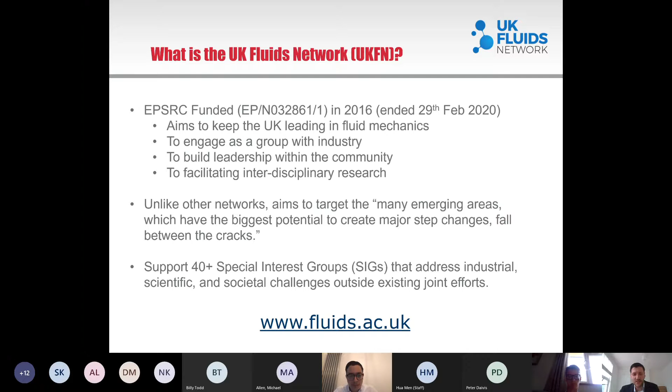So this slide is a bit old, but previously they supported about 40 special interest groups. If you go to the Fluids website, I think it's gone up considerably. The original deal was that you applied to do one of these special interest groups, and they gave you a small amount of money for a conference, a couple of thousand pounds, and then the idea is you then fund your next conferences.

Now the nice thing about doing this online is it doesn't cost us anything. So this one we've done free, but in the future, if anyone would like to host or has a bit of funding for a conference, we can definitely advertise it through this, under the banner of this. It's meant to be a UK based consortium, but to be honest, it's really just historical, and we can definitely grow something more international from that - it's my opinion.

So a special interest group, as I mentioned, is this idea of separate areas within fluid dynamics which we target. Now, the logic of doing a special interest group in non-equilibrium molecular dynamics was really to target this gap between statistical physics and doing fluid dynamics with molecules. We already had a really good SIG in fluid dynamics across the scales that covered molecular dynamics, but also extended to lattice Boltzmann and lattice gas.

The idea here was to do something that's more focused on the NEMD type of problems. So that's the division.

You can tell I'm out of practice with this, struggling with all the tabs.

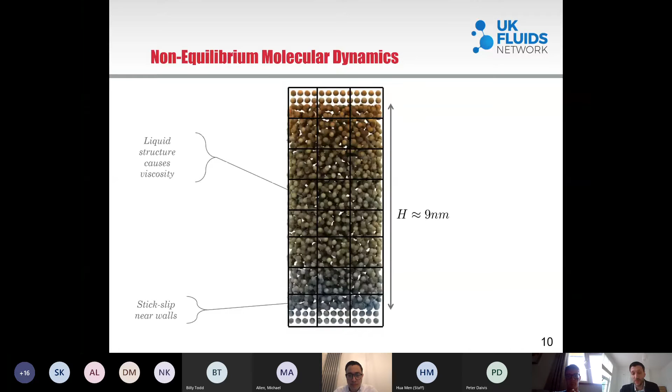What you see from those molecules bouncing around is this emergent property of fluid dynamics. You get nice behaviors that are uniquely molecular, like stick-slip near walls, viscosity coming from liquid structure itself. This overall behavior of the fluid is colored by velocity, positive and negative. You can actually extract fluid dynamics from the movement of molecules, and you get something like Couette flow from that.

So this is one aspect, just running some molecular simulation and averaging it.

I'd say the other thing we bring as a community, and this is where the link to fluid dynamics and the UK Fluids Network is important, is we have this whole physics and chemistry community with concepts like radial distribution functions, liquid structure, fluctuation theorem, Liouville's equation, and the way we get viscosity and surface tension from the underlying system. These are just some examples. This is where we have real ability to offer the fluids community, understanding how we get these emergent properties and linking statistical mechanics to fluids. That was the real incentive for doing this.

So the subject and scope is NEMD is fundamental fluid dynamics, but using MD. The non-equilibrium here is because of thermodynamic origins, things like wall motion, temperature or pressure gradients driving a fluid away from thermodynamic equilibrium, or equilibrium with an interface, locally spatially inhomogeneous. This is fluid dynamics - all of these problems are exactly what we're studying in fluid dynamics, but we can simulate them in a more fundamental way, with statistical mechanics underpinning that lets us make sense of fluids problems.

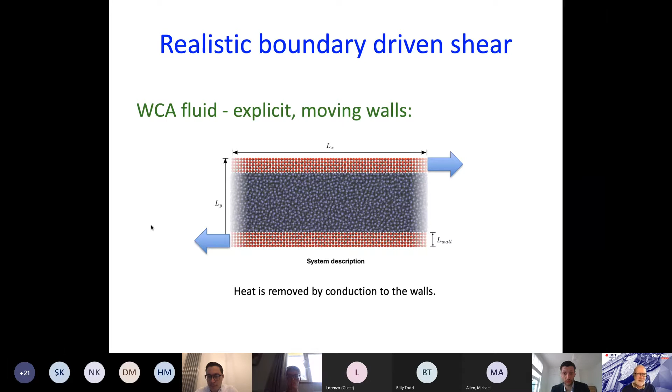So let's look at a boundary-driven shear system where we have a couple of walls and they're moving relative to each other, and we have a fluid in between. And in that case, the heat that's produced by the shear, the dissipation due to shear, that's removed by conduction to the walls in this particular type of simulation. So we can thermostat the walls and remove the heat naturally, and that means that there's no sort of artificial thermostat applied to the fluid.

Oops, oh, I didn't mean to do that. There we go.

And we can describe that system by looking at the entropy production, because we can think about it from the point of view of non-equilibrium thermodynamics. And based on the ideas of local thermodynamic equilibrium, we can write down an entropy balance equation where we have, in the green there, the entropy flux, and in the other colour, beige or something, the entropy production. And the entropy production consists of two terms for a single component system. We've got a term that's proportional to the temperature gradient and the heat flux, so it's bilinear in the flux and the field, or the driving force, thermodynamic driving force. So that's the entropy production due to heat flow. And then we have another term which is the entropy production due to the deformation of the material, so that's the viscous flow term in the entropy production.

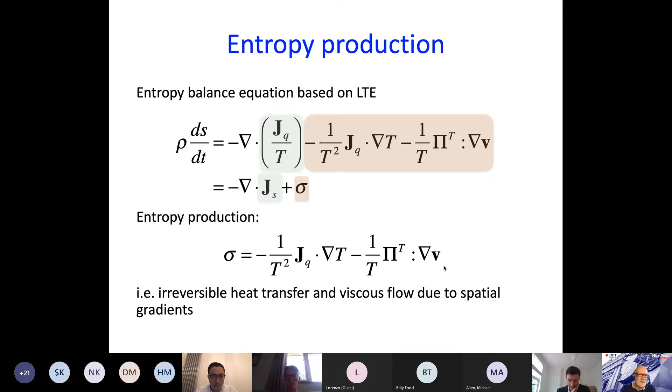So that's all good. So what about in homogeneous shear? In homogeneous shear, we have a very well-defined value of the density at all points in the system. The temperature is uniform, and we have no spatial gradients.

So that means if there's no spatial gradients in anything, it means that we have to use homogeneous thermostats to remove heat from the system. The heat is removed uniformly right across the system with no spatial temperature gradients driving heat to the walls. So that raises a question.

Does that mean that there's no entropy production due to heat flow? Because we have no spatial gradients of the temperature. So I'll leave that hanging, because this is the central question that I really want to address in this talk.

But there are many other thermostats that we can apply. This is the standard kinetic thermostat that we use in non-equilibrium MD very often, but this is not the only thermostat that we can apply.

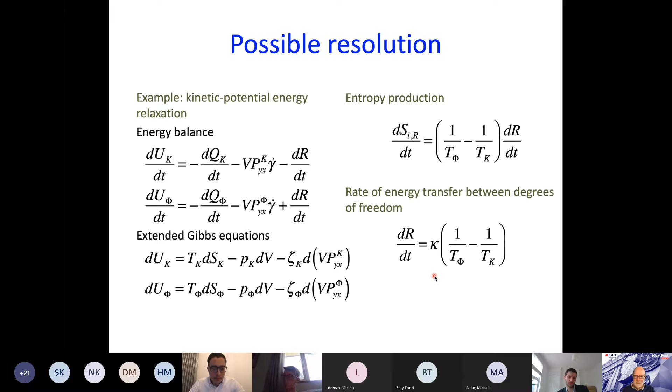So if they differ, and if heat is being transferred from one to the other, then there'll be entropy production. And we can postulate that there's a constitutive relation that describes the rate of energy transfer between two degrees of freedom, and kappa here would be an energy transfer coefficient that plays a similar role to the thermal conductivity, but this is for internal degrees of freedom instead of spatial transport.

So we conducted some simulations, and the aim of these was to determine the heat transfer coefficients so that we can use a model to predict temperature differences between the internal degrees of freedom, and watch how, when energy is applied to the system through work, through the viscous heating, energy goes into the system, there'll be temperature rises. The rate of temperature rise will depend on the rate at which energy is transported through the system, and that'll depend on these transport coefficients.

So we'd like to determine those. And the simplest way to do it would be to control one degree of freedom to a different temperature from the others, and then just monitor the rate of heat transport between the degrees of freedom. So if we know the temperature difference between the two degrees of freedom, and we can calculate the rate of transport, then we can calculate the transport coefficient. So it sounds deceptively simple.

We can calculate the internal energy fluxes and determine these heat transfer coefficients. Let's assume we have 6 different heat baths. We can have X, Y, and Z kinetic heat baths, because the momentum can be broken up into X momentum, Y momentum, and Z momentum, giving us 3 kinetic energy baths. Let's assume we can do the same with the configurational degrees of freedom and the potential energy.

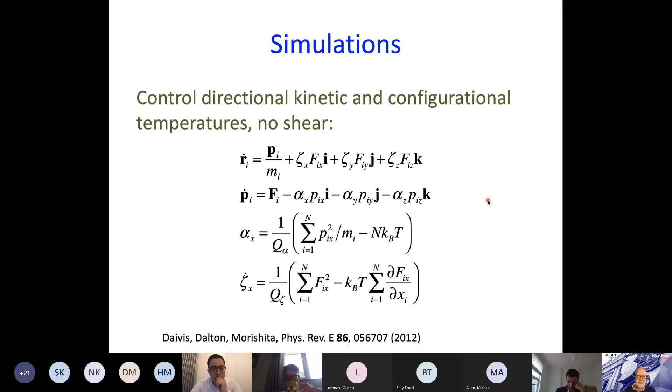These are with no shear on the system. We can also write down the internal energy balance, so we can work out the terms describing energy transfer into and out of the kinetic energy. Our kinetic energy changes - we can work out the change by taking the derivative, and we end up with these terms. This one, it turns out, also appears in the rate of change of the potential energy.

So that means it's a conversion of one into the other. This is transfer of kinetic energy out of the system into the thermostat. Each one of these is transferred to one of the thermostats. You can see that because that's a dot product, it can be broken up into the three directional terms. So it sort of makes sense that we have a dKx/dt, a dKy/dt, and a dKz/dt.

Our potential energy looks very similar, but notice that this conversion term has the opposite sign, because energy that comes out of the kinetic degrees of freedom goes into the potential degrees of freedom. And we have transfer to the configurational thermostat as well.

So we just did some simulations on a very simple system - just a few hundred WCA atoms at a typical liquid density. But the important thing here is that the temperature of the X kinetic degree of freedom was 2, whereas all other temperatures were constrained to be equal to 1.

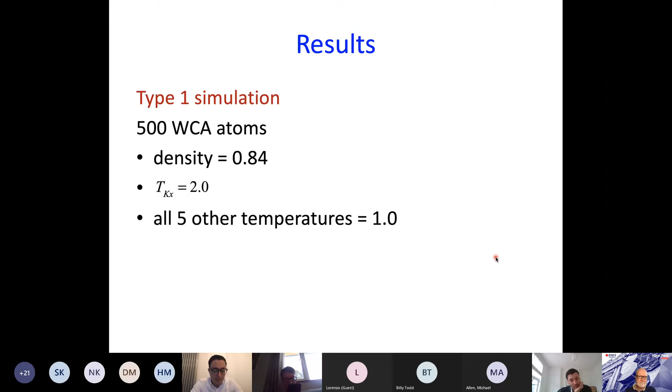So in that case, heat should flow from the kinetic into the other degrees of freedom via the mechanisms that are possible through the internal energy balance equation. This equation tells us what energy transfers are possible. So let's look and see what we get.

In this type 1 simulation, we have T1 on all of these degrees of freedom and T2 on this one, which is higher than the others. Now there's no direct mechanism for energy to be transferred, say, from the X to the Y kinetic degrees of freedom, because the only energy conversion terms we saw in the internal energy balance were between X kinetic and X potential, or Y kinetic and Y potential. So what we should see is energy transfer through here, but not sideways.

And what we see is that when we look at all of the contributions to the energy balance, the overall energy balance is satisfied - so energy transferred in equals the net energy transferred out, when we consider the energy transfers by all of the thermostats.

However, we also saw that there are some energy transfers when there's no temperature difference. In other words, we're getting a flux between two heat baths that are at the same temperature. That just seems wrong - these two are supposedly at T1, and yet there's a net heat flow from one to the other.

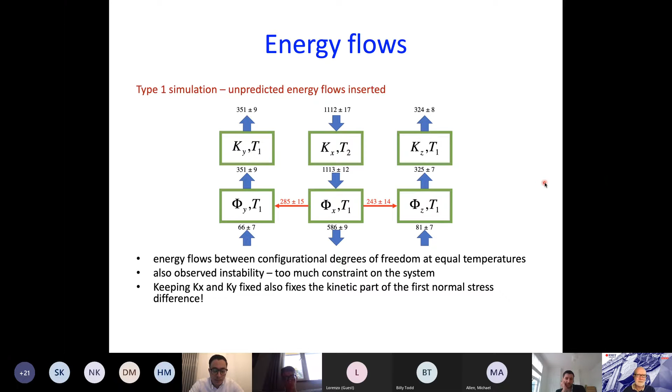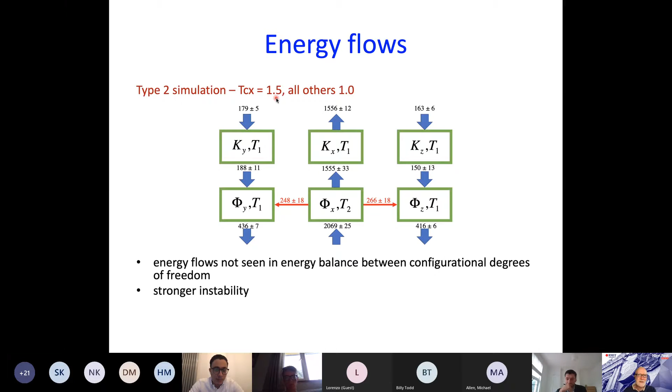We can do another simulation where we keep the configurational temperature, the X configurational temperature, fixed at 1.5 and all of the others fixed at 1. And again, we get these energy transfers that are not seen when you work out the internal energy balance. And it's even more unstable. So that's why I had to do a temperature difference of 0.5 instead of 1.

If we leave the kinetic temperatures uncontrolled to release some of the constraints, then again we still find these unaccounted-for energy transfers. The overall energy balance adds up, but it doesn't seem to make sense, and we're still getting energy transport between degrees of freedom that are supposed to be at the same temperature.

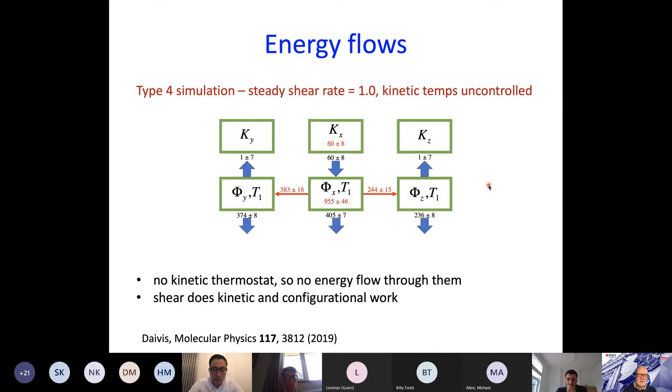So it's all very puzzling, but we need to think again. First of all, let's go back to our idea of local thermodynamic equilibrium and ask ourselves, is it legitimate to separate the entropy? Entropy and temperature are intimately associated with each other because they occur as TDS in the energy balance.

Can the entropy be separated into additive contributions? Well, yes, you can divide the Hamiltonian up additively, but notice there's no way you can split this potential energy. There's no obvious way to split it into X, Y, and Z components.

And what you see there is that the distribution function factorizes, and therefore the entropy at equilibrium can be written as a sum of X, Y, and Z kinetic entropies and a potential entropy, an entropy associated with the configurational degrees of freedom, but that doesn't seem to be able to be divided up into X, Y, and Z components. So maybe it's illegitimate to do that, and ill-advised.

So what we see is that our overall energy balance is always satisfied in these simulations, but we see extra energy flows between configurational degrees of freedom, and even between degrees of freedom that are supposed to be at the same temperature. So clearly there's something wrong, either with our definition of the temperature or with the way that we've broken the energy up into different energy baths.

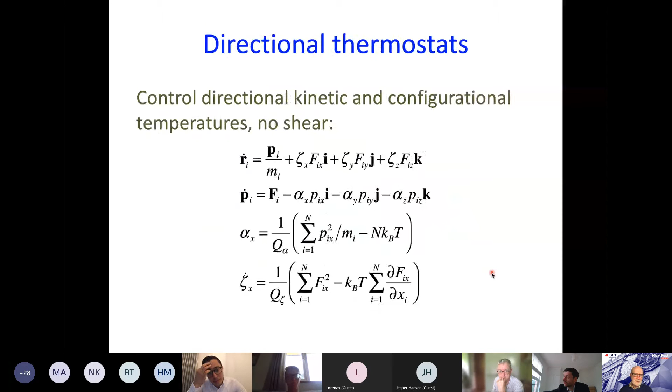Yeah, well, the thermostats definitely are constraining the system, and you can see that back here when you look at the kinetic temperature. Do I define that? Up here. Yeah, when you look at your kinetic temperature, it's proportional, say, to pi_xx squared—this is the kinetic part of the pressure tensor. So if you constrain both of these temperatures to a fixed value, what you're really doing is constraining the first normal stress difference to a fixed value. Now, first normal stress difference really corresponds to a nonlinear flow effect.

So what we're actually doing is a little bit like a Norton ensemble simulation, where you're inadvertently applying a normal stress to the system, even though you haven't got any flow. It's quite weird—what you're doing is really squeezing the system, and eventually flow will result. So these thermostats are diabolical. If you have too many thermostats, you're actually constraining the system too much. That's my conclusion.

Okay, so do you think something more, a stochastic thermostat, might be an avenue to explore? I'm not sure that it's the mechanism of thermostating—I think it's the degrees of freedom that you're thermostating that's the problem. Too many degrees of freedom being constrained in any way, regardless of the thermostat type.

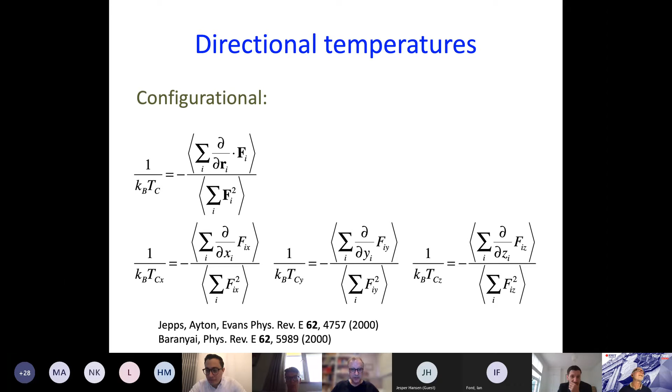I need to stop sharing. But wow, I need to go to a different window. I could just give you a talk again, Peter. That's all right, Billy. I've figured out how it was on the other screen. Right, okay, let me try and do the same here and share the screen.

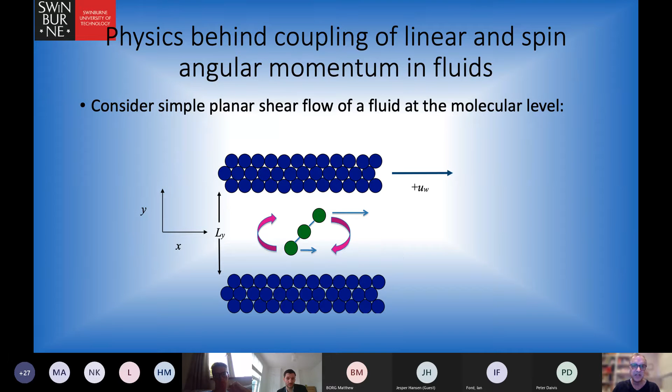You can just intuitively see how that would work, because let's say you have this molecule here in green. The molecule, of course, consists of atoms that are tethered. Because there's a velocity gradient, this molecule at the top close to the moving wall will move faster than the atom at the bottom. So the molecule will tend to spin, to flip over on itself, and so you get spin, basically. So in addition to a linear streaming velocity, you also get a spin velocity. That's really the key thing involved in this coupling mechanism.

However, the formulation for the inclusion of molecular structure — that is, the inclusion of spin and rotational viscosities — does exist. In fact, it's been known way back since Max Born's time in 1920. Snider and Lewchuk first formalized it in terms of Navier-Stokes hydrodynamics in the 1960s. Evans and Streett showed how you could calculate the associated transport coefficients back in the 1970s. And of course, there's a description of all this in the famous book, Non-Equilibrium Thermodynamics, by de Groot and Mazur.

Basically, what you get, though, is now instead of one simple differential equation governing the flow of linear momentum, you get two. You get an expression for the linear streaming velocity, or streaming momentum, and you get an expression for the spin angular momentum as well. These two equations are coupled, and they're coupled by this so-called rotational viscosity, eta r.

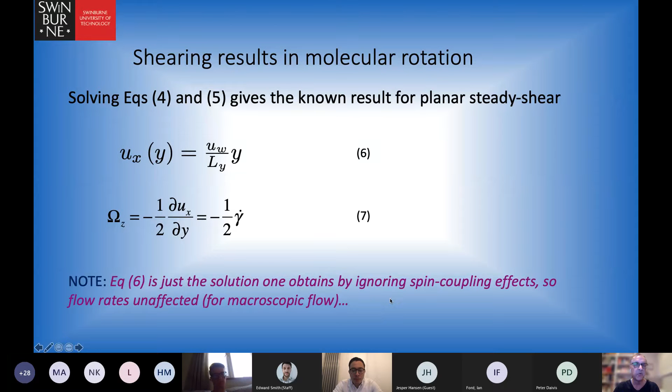What you get is the same linear velocity profile as you would get if you ignored spin coupling altogether. But you also get an additional expression relating the spin angular velocity with the strain rate gamma dot. The important thing is that this top equation is exactly the same solution you get by ignoring the spin coupling effects, which is why you don't really need to worry about them in macroscopic flows.

And of course, Edberg, Evans and Morriss showed this - they simulated, by homogeneous NEMD methods, butane under a planar Couette flow, and they indeed did see this nice effect in the linear regime, where the angular velocity is proportional to 1/2 of the strain rate.

Okay, so that's the basic idea. So now we ask ourselves, if shear can induce molecular rotation, can you flip this? Can you do the opposite - can molecular rotation induce shear flow? And if there's a way that you can do it, then it suggests there's a way you can manipulate the flow of fluids without the need for mechanical pumping, as long as you can find a mechanism to rotate the molecules.

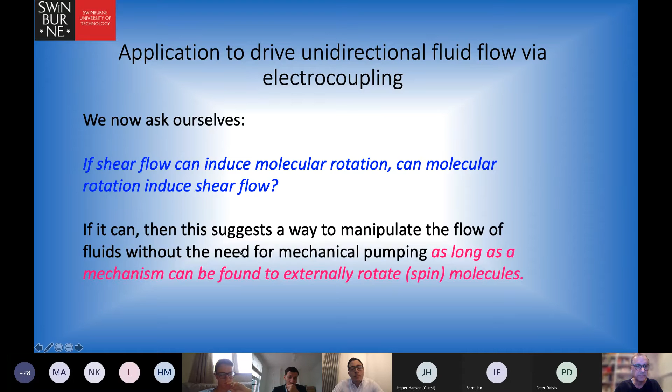And indeed, that is what you can do, by applying a rotating electric field. Now, this was first proposed by Bonthuis and colleagues back in 2009 - forgive me if I pronounce his name incorrectly. Some work that we did with Jesper, Peter, and myself back in 2010 also confirmed this.

Now, if the walls are the same material, what you end up with is equal and opposite flow - you get half of the molecules moving to the right and the other half moving to the left. Unfortunately, that's no good if what you're interested in is pumping, because that gives you zero net flow. So what do you do to solve this problem?

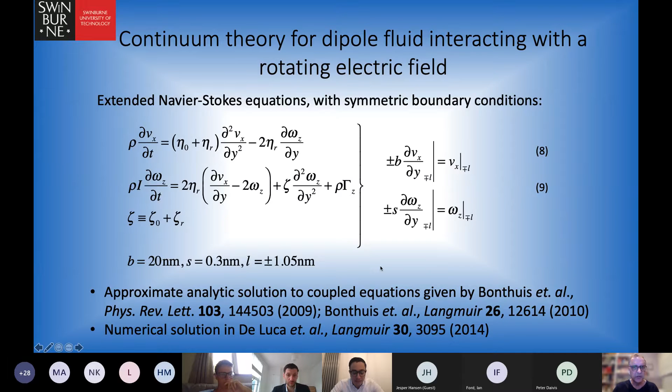So that's the basic idea of the spin coupling. Now you can solve these equations either numerically or by non-equilibrium NEMD methods, and in fact we've done both. So what I'll do is show some results now.

So here's some typical systems we've looked at. Here we've got graphene sheets, so basically symmetric boundary conditions. We put water molecules in it, apply an external rotating electric field, and look at the velocity profiles. Or we can break the symmetry - here we've got one wall which is hydrophobic, a graphene wall, and another which is hydrophilic, in this case a beta cristobalite, which is a kind of silica wall. So it's hydrophilic, and we break the symmetry. Again, we put water molecules between them and apply an external rotating electric field.

And what you get are profiles that look something like this. So here is our asymmetric situation. Here we've got a hydrophilic wall, and here we've got the hydrophobic wall. And as you can see, you can get linear velocity profiles. This is a velocity profile as a function of position within the channel. And for a fixed amplitude of the electric field, as you increase the frequency, you get greater and greater flow.

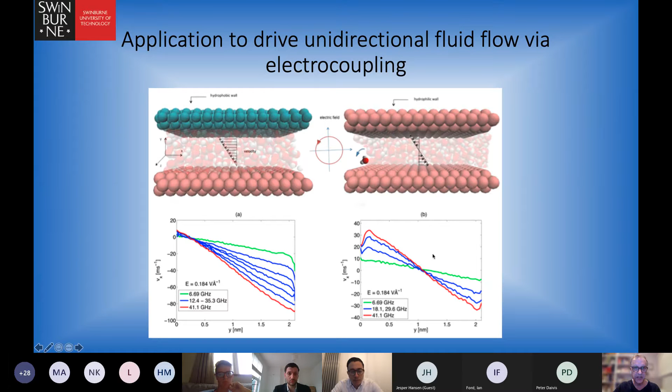For our symmetric walls, so here we've got two hydrophilic walls, you can see that we get equal and opposite flows. So we get flows going to the left on one half of the channel and flows going to the right. So if you sum them, you get zero net flow.

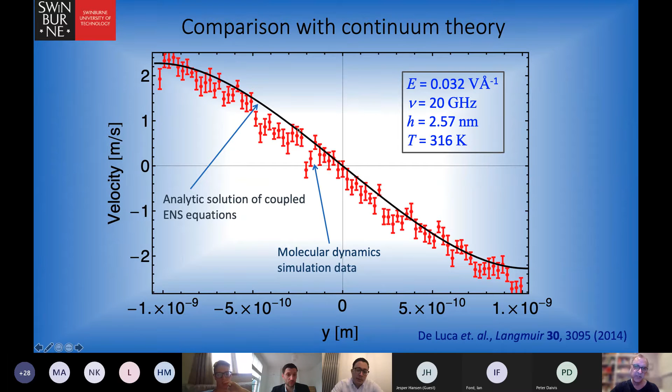You can compare these results with continuum theory as well. And if you do, so here's the analytic solution of those coupled extended Navier-Stokes equations. And here are some molecular dynamics simulation data. So the theory agrees very well with the simulation data.

Now, very quickly, let me show you that you can do the same with nanotubes, so you don't have to do it with just planar surfaces. So if we now functionalize a carbon nanotube and put in half of it, we semi-functionalize half of it with carboxyl atoms to make it more hydrophilic, and the other half remains carbon nanotube, fill it with water, apply a rotating electric field, we can see that we get this kind of velocity map.

So here we've got a 2% functionalization on the top half of the carbon nanotube over here. The flow is reduced in the top half, and it's more intense in the bottom half, as you can see with this velocity map. As you increase the functionalization, what happens, perhaps counterintuitively when you think about it initially, you think, well, surely you increase the velocity flow, but in fact you don't, you decrease it.

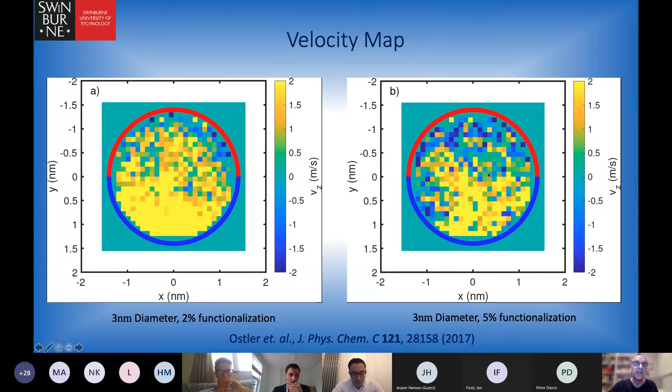And the reason is that as you're increasing the functionalization, you're increasing the number of these carboxyl groups that are protruding into the nanotube itself. And they then tend to block the flow of water molecules. So there is a little bit of a sweet spot in terms of the degree of functionalization.

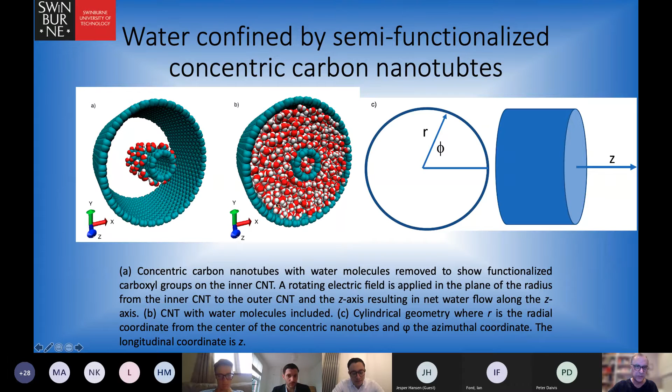Another way we could do this is to look at water confined to concentric nanotubes, where the inside nanotube is functionalized with carboxyl groups, the outer one remains just a pure nanotube, and then you fill the gap with water. You apply the rotating electric field in the RZ plane, and you get a similar effect, okay? So you can find flow, and you can do it for different size nanotubes. You can do it for different degrees of functionalization.

Okay, so that's then the basic idea and different systems that we've looked at. And now in the last few minutes, let me talk about the efficiency of this technique.

So it was kind of neat to be able to show that this technique can work. But the question now that we have to ask is, well, it might be academically of interest, but is it actually going to be potentially useful? And one of the things that we needed to look at was, how energy efficient is it? And so that's then what this study is about. What is the efficiency of electropumping compared to, say, traditional planar Couette and planar Poiseuille flows?

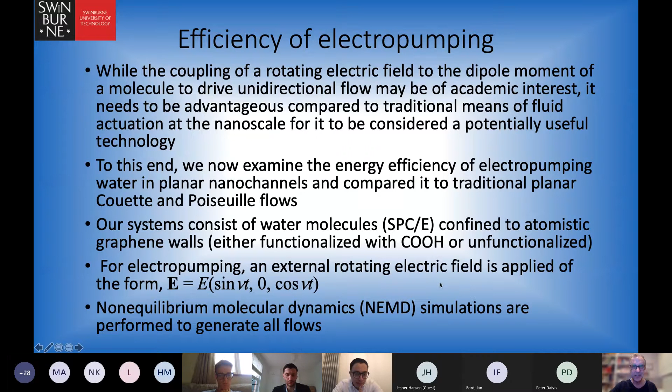So the system that we look at is, again, a typical SPC/E water molecule confined to atomistic graphene walls, either functionalized or unfunctionalized. We apply an electric field, rotating field of this form, so it's rotating in the XZ plane, and we perform NEMD simulations to generate all the flows and then calculate the efficiencies.

They actually solved this theoretically, and I won't go through too much detail with how they did it, but basically they got this expression here, equation 13. That was a nice simple expression for the average power dissipation for such a system. Now, it was a theoretical estimate, and it did not include the inhomogeneity of a highly confined fluid.

They concluded that the method would be too power intensive. In other words, you'd need very, very high intensity electric fields, and they just wouldn't be competitive in terms of being a useful technology. So they basically didn't bother any more than that.

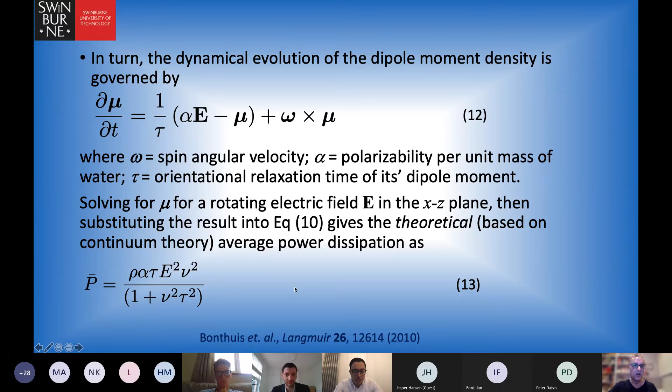But this is the important thing, that their system ignored the inhomogeneity when you're looking at a system like water confined to planar nanochannels or nanotubes. So that may not be valid at substantially high degrees of confinement. And later on, I'll show you that that is indeed the case.

So if you integrate this expression over the whole fluid volume, it will give you the total power. That's how we can do it for electropumping.

What about Couette flow? Well, that's quite straightforward to do that. If you look at the rate of work on particle I by shearing force applied to the particle velocity VI, it's just this simple expression, equation 15.

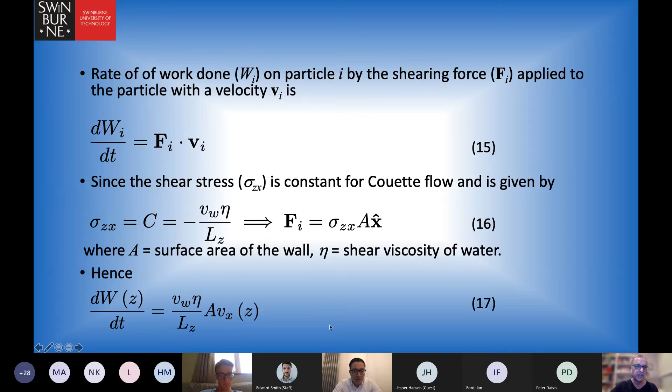Since we know that for Couette flow, the shear stress is a constant and is given by this expression here, where eta is the shear viscosity, VW is the velocity of the wall, then we get a simple expression for the force, which we can substitute into equation 15, and then we get our expression for the energy dissipation at position Z within the channel. So to get the total power, we just integrate over the whole channel height, and then we can get the total power for Couette flow.

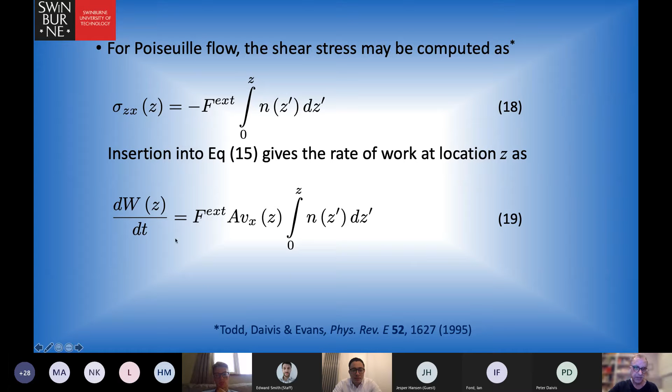Similarly for Poiseuille flow, where now we just have some external field, like a gravity-like field, acting on the fluid particles, we drive the Poiseuille flow. We can calculate the shear stress exactly. Effectively, it's proportional to the integral of the fluid number density, multiplied by the external field. Again, you get a nice simple expression for the power dissipation, which you integrate over the height of the channel to give you the total power.

So then we've got three very simple expressions that we can calculate for the power dissipation: one for electropumping, one for Couette flow, and one for Poiseuille flow.

So quickly, some results. The way that we do it is that we do a simulation for electropumping. We choose a particular electric field intensity and frequency. We look at nanochannels of different widths and the flow rate within the electropumping simulation. Then we do experiments for Couette flow, for functionalized Couette flow, and for Poiseuille flow, such that the flow rates are within 1% of what we got for electropumping. So we adjust the other parameters accordingly, and that way we can be sure that we're comparing apples with apples, so to speak, comparing systems that have the same flow rates within 1% error.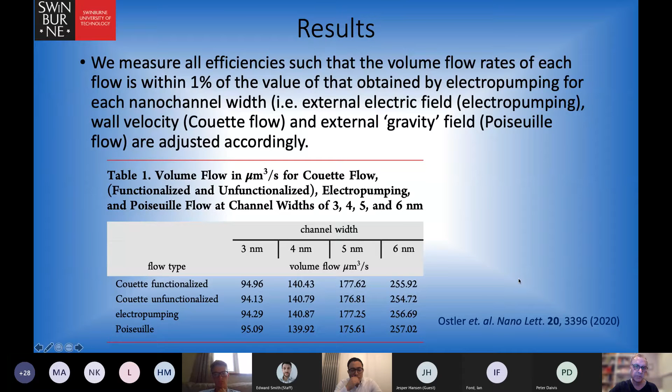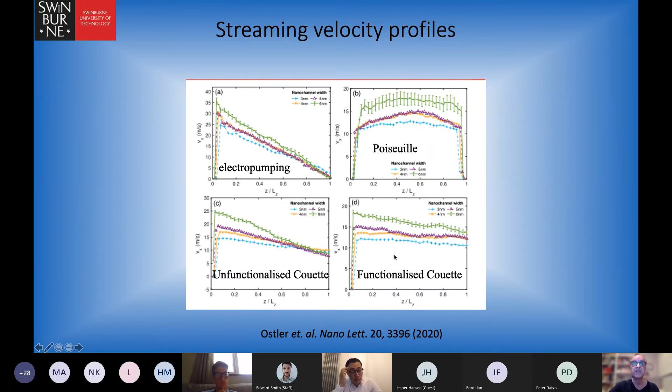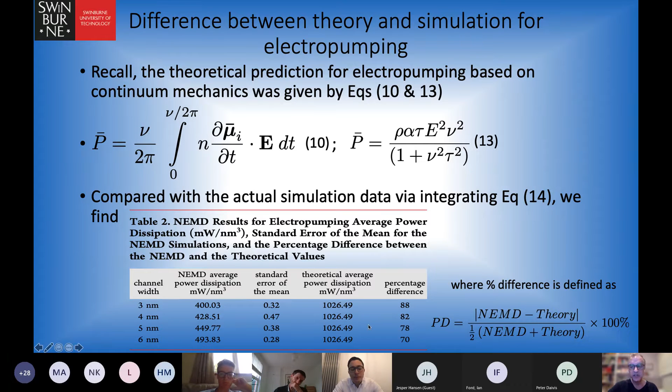And so certainly for the narrowest channel width, we've got a difference of a factor of about 2.5. They always said that their power dissipation was very high, and it is, but when you look at what you actually get, you're about 2.5 times smaller. So it's not as bad as what they first thought. And clearly, as you increase the channel width, the agreement becomes better, which is what you would expect—you'd expect the theory and the actual simulation to converge in the limit as the channel width goes to infinity.

What you can see is that functionalized Couette gives you the lowest power dissipation. Then comes non-functionalized Couette, then electropumping, then Poiseuille flow.

If we look at the relative efficiencies with respect to functionalized Couette flow, which is the most energy efficient, we find that unfunctionalized Couette flow is about 34% as efficient. Electropumping is a lot worse.

It's only 0.01% efficiency, but here's the important thing: Poiseuille flow is 4 orders of magnitude even less efficient than electropumping. That surprised us substantially. We actually thought when we started this that electropumping would be the least energy efficient, but it's not.

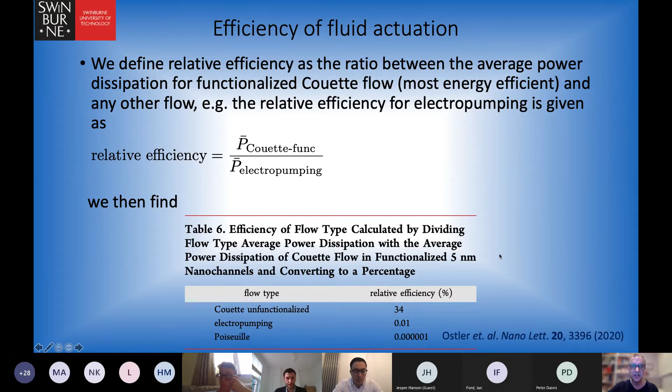And this is the point: Couette flow, while it might be more energetically efficient, is not actually a conventional means of pumping fluids. Maybe it can be devised as such, maybe there are ingenious ways in which it can be done, but to my knowledge, for such nano-confined systems, that technology doesn't currently exist.

So quickly, conclusions. Hopefully I've shown you that electropumping is this relatively new idea that we can use to pump molecules with a dipole moment, such as water, via coupling a rotating electric field with suitable asymmetric boundary conditions to generate unidirectional flow.

It can be applied to planar geometries, but even to systems that are non-planar, such as nanotubes. We've shown the relative efficiencies of the different schemes, where Poiseuille flow is the worst compared to electropumping, by about 4 orders of magnitude. Then comes non-functionalized Couette flow, and the most efficient is functionalized Couette flow.

As I mentioned, while Couette flow might well be the most energy efficient, is it a suitable pumping mechanism? I'm not so sure that it is. But of the two more suitable pumping mechanisms, electropumping is certainly considerably more efficient than Poiseuille flow.

As far as I'm aware, there are no laboratory experiments yet that have verified these results, but it would be really nice if that is one day verifiable. Certainly NEMD simulations show it can be done, and they've agreed with theory, so all that's missing now are the experiments to prove it.

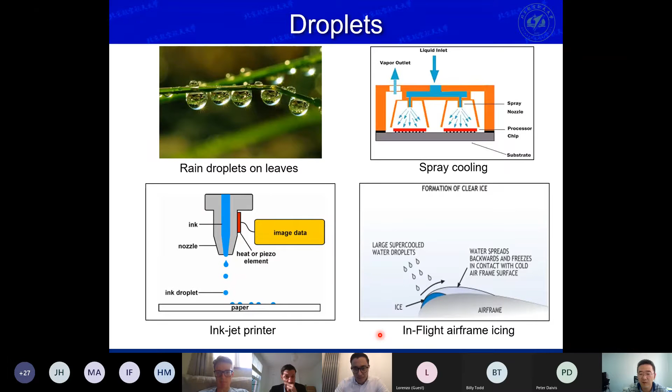My research about droplets is actually at the nanoscale. I think nowadays, because of the improvement of nanotechnology, we can generate droplets even down to the nanoscale. For instance, here is a research report from a research group in ETH. They reported that they can generate nanostructures on surfaces.

Using the print of nanodroplets. So even if you study the macroscopic droplet, the droplet may be on the millimeter size, but the interface—like the liquid-gas interface and the three-phase contact line—are on the nanoscale. So intrinsically, the droplet has a multiscale nature. That's why we study using molecular dynamics and multiscale simulation.

My personal research interest is multiscale molecular dynamics and multiscale simulation. The software, the computation code I use, is OpenFOAM. When I worked in UK from 2014 to 2017, I had the opportunity to be involved in a big project led by Professor Jason Reese, and the group developed the multiscale simulation platform based on the OpenFOAM framework.

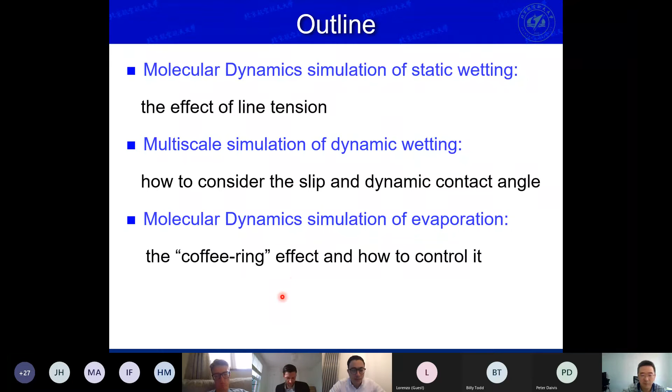The main content I will talk about is 3 parts. The first is the MD simulation of static wetting, and I will focus on the effect of the line tension. The second part is how to do multiscale simulation of dynamic wetting, where I will talk about how to consider the slip model and the dynamic contact angle model. The last part is the MD simulation of evaporation, and I will focus on the coffee ring effect and how to control it.

Now the first part, the MD simulation of static wetting. In MD, I think the most important thing is the pair potential. Because we simulate water droplets, we use the TIP4P 2005 model to simulate water.

In this model, for each water molecule there are 4 sites: one oxygen site without any charge, two hydrogen sites with positive charge, and one M site with negative charge. The interactions between water molecules are based on both Lennard-Jones potential and Coulombic forces. The Lennard-Jones potential is applied between the oxygen sites, and the Coulombic forces are applied for all the sites that have charges.

Because we simulate droplets on platinum-like surfaces, we also need the potential function for platinum. We use Lennard-Jones potential as well. As for the interaction between water and platinum, we use Lennard-Jones potential too, and we use the Lorentz-Berthelot mixing rule to adjust the parameters, particularly here for the energy.

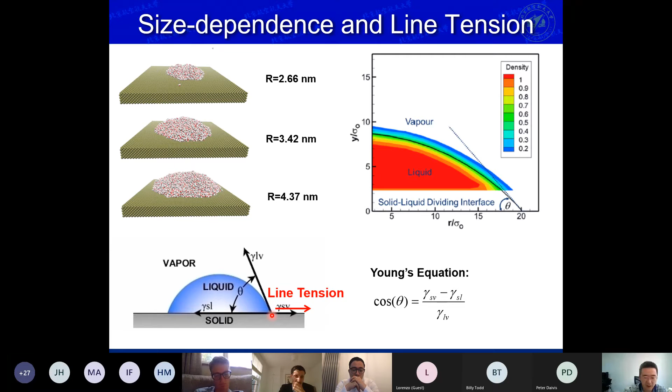Because of the line tension, the Young's equation has to be modified like this, where tau is the line tension. We can see that if the line tension is positive, the droplet will shrink and the contact angle will become bigger. Conversely, if the line tension is negative, the droplet will spread and the contact angle becomes smaller.

Based on this modified Young's equation, we can do MD simulations. For instance, for the hydrophobic case and the hydrophilic case, we simulate 5 different cases of different sized droplets.

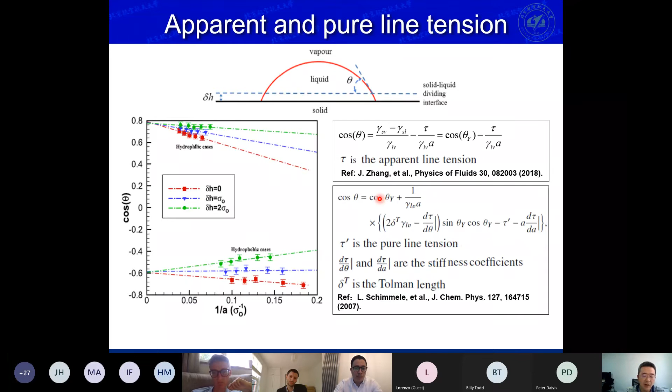So this is the first part about static wetting and how the line tension affects the contact angle. The second part is how to simulate dynamic wetting. It's more complex than static wetting.

Of course, we can use NEMD to simulate a dynamic wetting problem, but the problem is NEMD is time consuming. If you want to simulate the whole dynamic wetting process, it will cost a lot of time. So an efficient way is to use the continuum simulation method, like VOF, volume of fluid method.

In VOF, we need the continuum equation, momentum equation, and we also need one equation for the volume fraction, alpha. The volume fraction is 1 or 0 for the liquid or gas region, and is in the region of 1 to 0 for the interface.

For VOF simulation, it's now a standard method. I think everyone almost does the same thing, but the tricky thing is how to implement the boundary condition, because it's known that theoretically, if you apply a non-slip boundary condition, there is a shear stress singularity problem.

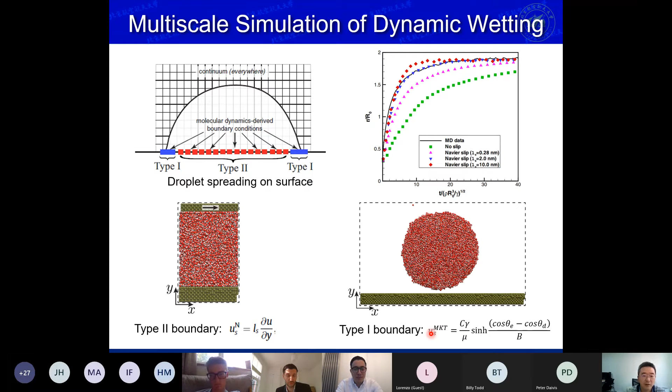So what is the MKT model? This MKT has been proposed maybe in the 1960s, a long history, and now it has been applied in a variety of problems.

The principle of MKT is that the dynamics of the contact line is determined by the statistical kinetics of molecules. When the contact line is at equilibrium, the frequencies of molecular displacement in the forward direction and in the backward direction are the same, so the contact line is static.

But if the equilibrium is broken, there is an uncompensated or unbalanced Young's force exerted on the contact line. Due to this force, the frequency in the forward direction is different from the backward direction, so the contact line can move. The contact line velocity is equal to the mean free path multiplied by the difference between the frequencies in the forward and backward directions.

According to the MKT theory, we can have a slip model like this, showing how the slip velocity is caused by the difference between the dynamic contact angle and the static contact angle. We can also use it inversely, showing how the dynamic contact angle is caused by the slip velocity. Some researchers use it this way, some use the dynamic contact angle, some use both. So it's actually equivalent.

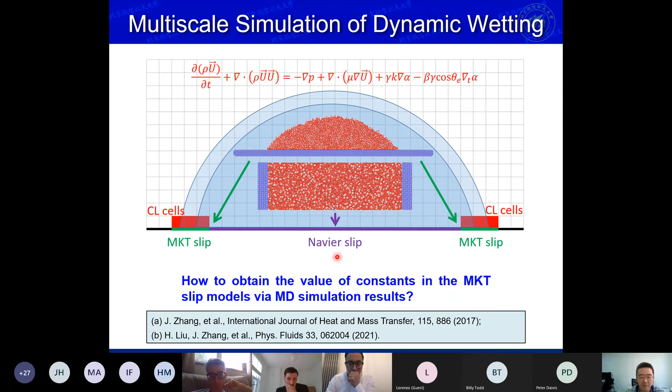And we don't need any dynamic contact angle model — the shape is automatically calculated based on the volume fraction. So now the remaining problem is how to determine the parameters in the MKT model and the slip length in the Navier slip length model.

So we use MD simulations. We simulate different sizes of droplets using MD and measure the density contours. We do a linear fit to measure the contact angle and get the contact radius. Here we simulate four different sizes of droplets.

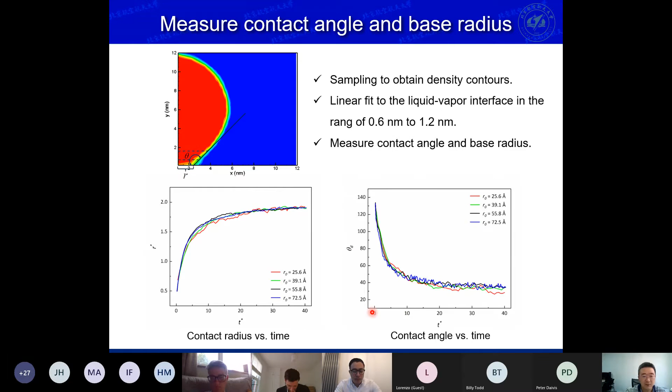After normalization, you can see the temporal evolution of the contact radius and the dynamic contact angle collapse onto one figure. Then we do a polynomial fit to the temporal evolution of the base radius, and from that we can determine the capillary number.

After we have all the MD data — static and dynamic contact angle, and the capillary number — we fit to the MKT model and determine the parameters in this model. We use the dynamic contact angle model to fit, but when we use it in the VOF method, we don't use this directly; we just use the velocity of the contact line in this way.

So now we show the results. The left side is our pure MD simulation, and the right-hand side is our multiscale simulation.

After we plug the slip boundary conditions into the VOF method, as you can see, the dynamic wetting process has a perfect match to the MD data. This one is for the smooth surface, and even for the pinned surface, we can see that our multiscale simulation is also consistent with the MD simulations.

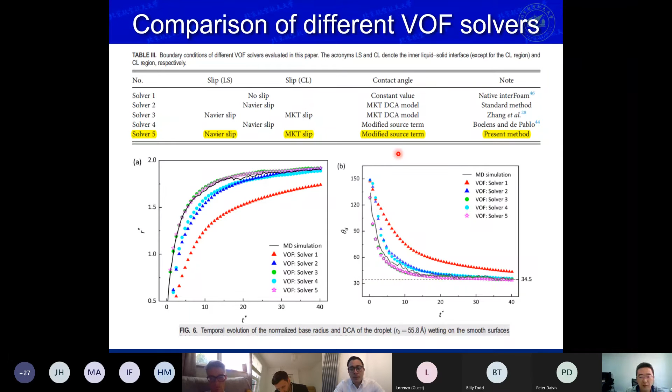Now I will talk about the last part, droplet evaporation and deposit pattern.

Jun, sorry to interrupt, would you be able to conclude at some stage? We're running out of time at the moment, so maybe 2 or 3 minutes, is that okay? No problem, okay, I will, yeah.

So the last part is about droplet evaporation. We focused on the deposit pattern. Maybe all of you know the coffee ring effect. Here we did MD simulations of salt water evaporation, because if we increase the temperature of the surface, the water will evaporate and the salt ions will be deposited on the surface.

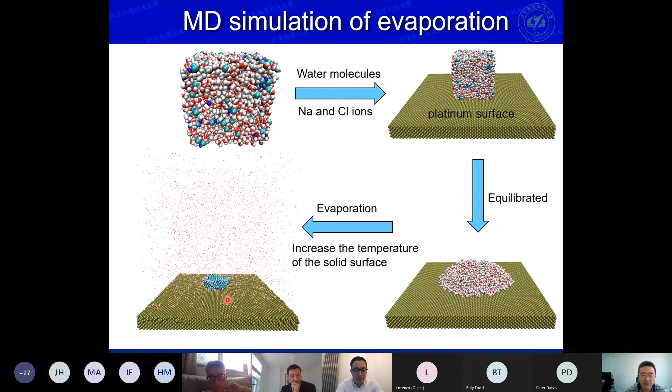Here I can show some different patterns. As you can see, we simulated different salt concentrations and different ramp rates, how quickly the temperature increases. If the ramp rate is quicker, we get the clump pattern, but if the evaporation is slower, we get the ring-like pattern.

The reason behind this is that during evaporation there is a pinned stage, where the contact line is pinned on the surface, and there is an internal flow from the center to the rim. Because of this flow, the salt ions can flow from the center to the rim and finally form the ring-like pattern.

We use MD to explain how the phenomenon is formed, and then we use the electric field to control the patterns. Because of time, I'll just use this one to conclude what we have found.

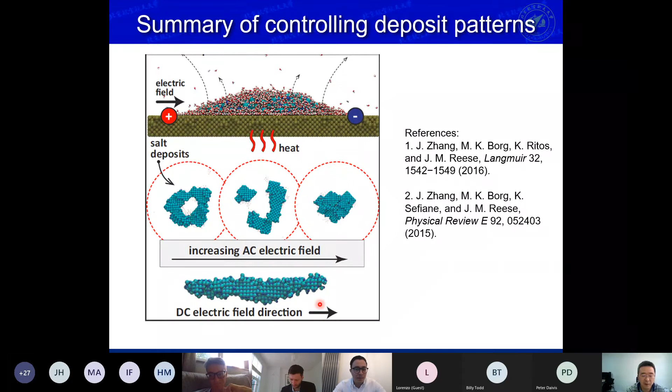If we use an AC electric field, we can adjust the ring-like pattern to a clump. If we use a DC electric field, we can change it to a ribbon. This is using electrowetting to control the patterns.

Besides the MD simulation of droplets, I'm also doing some DSMC simulations and applications for rarefied gas flows in aerospace engineering. I'm also doing some data-driven discovery, and maybe we can discuss later. Okay, thank you for your attention.

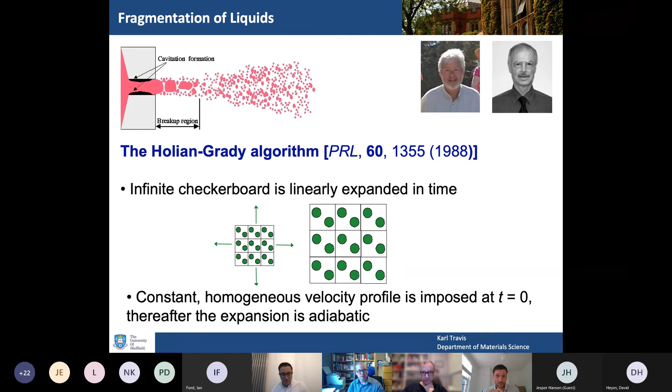So what's this algorithm? You take a periodic simulation box - here illustrated in 2 dimensions, fully periodic - and you simply undergo uniform dilation. You stretch it by imposing a velocity profile at time 0, and thereafter the expansion is adiabatic. You grow the box lengths; in this case it's a square cell, so each side length is the same, as a function of time.

So you take L of 0, the original time-0 box length, and multiply it by 1 plus eta dot t, where eta dot is the strain rate.

And I said you had to augment the velocities at time 0 - you take the thermal components of velocities and add on this contribution that accounts for the fact that it's expanding. So you do that at time 0.

It's reminiscent of how we used to do planar Couette flow before SLLOD and DOLLS came along. You did it through the periodic boundary conditions - the so-called Lees-Edwards sliding brick periodic boundary conditions - and you just waited for the flow to develop.

The DOLLS tensor, on the other hand, does it through the equations of motion, and you can handle more complicated situations with time-dependent flows. In addition, once a particle crosses the periodic boundary - remember the boundary is changing in time - you have to fix the velocity and change it to an appropriate value when it comes back in on the other side. That's the essence of the Holian-Grady algorithm.

And what can you do with that algorithm? If you start with a square patch of fluid - in this case a Lennard-Jones spline potential, again in 2 dimensions since it's easier to visualize -

you start off from a density of 0.75 and temperature equals 0.6, in Lennard-Jones reduced units, and stretch it at a rate of 0.107 - quite why that particular value, I'm not sure, but that's what they chose. Then you stop the simulation at some particular difference in box length, or box area or volume, whatever you want to call it, and examine the contents.

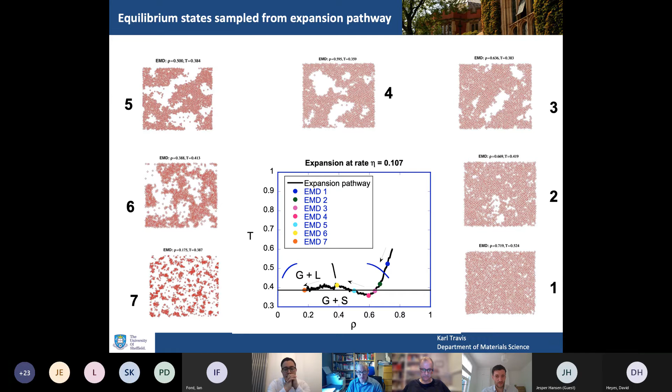And compared them along this pathway, and you can see that qualitatively, at least, they look quite different. Quantitatively, the way you would do this, and the way I did it back then, is by counting clusters and performing some cluster statistics. These are Stillinger clusters, and then you can show that the mean fragment size is quite different, the fragment distribution is quite different along these two different pathways.

Now, I said this was all about DOLLS tensor, and when I gave that talk at Obergurgl, I think it was Billy Todd, who came up to me and said, actually, what you've described sounds a bit like DOLLS tensor. And I thought about it, and I thought, well, it does, and that would make a more suitable way of doing the simulation rather than the Holian and Grady method.

And so I set about just trying to do it by DOLLS tensor. The way this is done is set the strain rate tensor equal to epsilon dot times the Kronecker delta tensor.

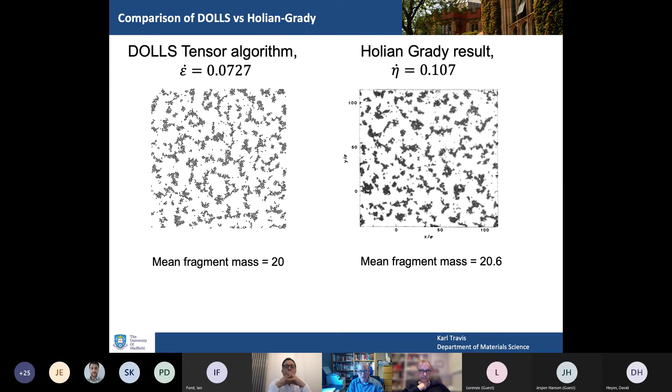Some of you will argue, well, that's just a picture - you can argue anything from a picture. But when you do the cluster analysis, you find that the mean fragment masses are equivalent. There is an error bar associated with that, and I've worked up quite a lot of data, but I haven't got time to get into it. I can assure you that they give identical results within the statistical uncertainties.

So that's got an interesting application. Another interesting application with a different motivation - I was interested in looking at fracture, solid fracture, so ball plate penetration. I'm doing some work with Puneet Patra at the moment and his PhD student on this.

But at the time, I was looking for a way to parameterize SPH, smooth particle hydrodynamics, from molecular dynamics. We wanted a way to find out Young's modulus, the yield strength, and the ultimate tensile strength for any given pair potential. Now, the way you do that in a real experiment for a real material, not talking about pair potentials, is to do a tensile test, and then from the stress strain curve you could get those numbers.

So I wondered if I could do this by molecular dynamics, looked in the literature, and you can find discussions on various algorithms in there. I've labelled them 1 to 4.

The first one is the so-called naive approach, where you've got your simulation box with molecular dynamics particles representing a solid. It doesn't have to be a triangular lattice, I've just drawn it like that. And you apply an external force, but where do you apply it? Well, you can apply it to the end particles at the edges. That's the most obvious thing to do, but that quickly can lead to failure - not the failure you want, as you'll see if you try that.

I then saw that in Bill Hoover's textbook, he did it in a much cleverer way. He applied the forces in a piecewise form that grew linearly with time, and the maximum of the force is about 2/3 of the way along the test specimen. This test specimen is supposed to represent a dog bone shaped specimen, that's why I've shaded it in that way.

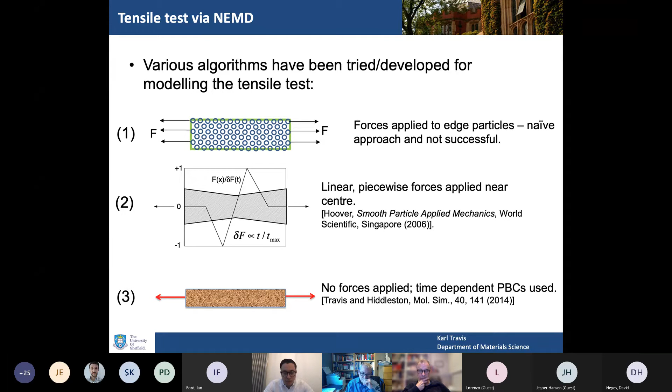And then another way, which is the way I did it with a student, Tom Hiddleston, we did it with stretching periodic boundaries in the same way that I talked about the fragmentation, but now only in one direction. So how do you do this by DOLLS tensor? This is method 4.

Well, you'd write your strain rate tensor in the following way. So you've got EXX dot as the first non-vanishing, the only non-vanishing element. That leads to equations of motion - again, I'm in 2D, you can easily extend this to 3D. And you can see the extra terms going to the QX dot and the PX dot. And then you've got the form for the only expanding box length. The Y box length stays the same, and it's only periodic in the X.

So if we start from a triangular lattice with a density of √4/3, so all the particles are unit spacing apart, using a pair potential that Bill Hoover first introduced, and I'm fond of using because I know the phase diagram for this material: 2 minus r squared to the 8th minus 2 into 2 minus r squared to the 4th, valid for r squared less than 2. So it's quite short range, very smooth, and very cheap to compute - you don't have to mess around with long range corrections.

Being homogeneous, you can use the zero wave vector stress, the microscopic stress tensor, to calculate the stress - just the usual expression from the virial. And the strain here, it's easiest to calculate the engineering strain from the difference of the box length at any time t relative to its time 0.

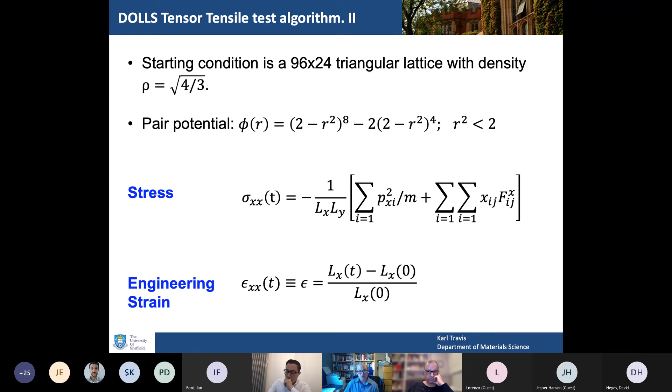You can also calculate the stress using method of planes or smooth particle averaging, which is why I did it today - you look at the central plane and the momentum flux across that plane. That's the way I also did it. So here are some results.

I've nearly finished, so don't worry if I'm sailing close to time. Here are the results on the left-hand side from Hoover's method, the piecewise additive force. Here we've got a rectangular bar that we pull apart under tension by applying these external forces, and you can see that the bar breaks. It's brittle fracture, as you'd expect with these simulations.

Down at the bottom right on the left-hand side, we've got a stress-strain curve, and we can see that it goes up to about 6 - it's 6 in Hoover's book, pretty much - and then it fails at a 10% strain. That's typical of brittle fracture.

If we look at the stress profile calculated with method of planes, we can see that the stress is anything but uniform in X and Y. But the value at the central plane at X equals 0 is 6, which corresponds to the value we've shown here. Now on the right-hand panel, I'm showing snapshots of the failure.

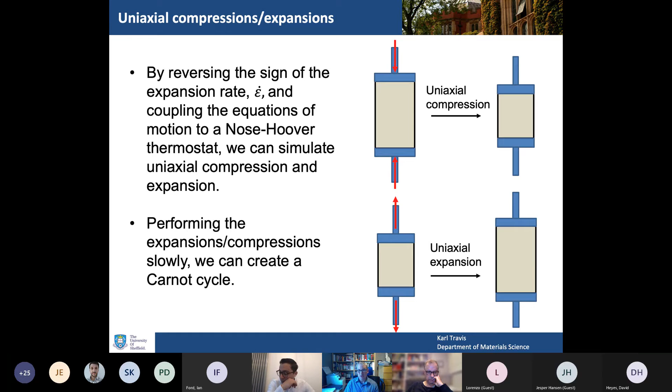Just by reversing the expansion rate so it becomes negative, and coupling the equations to a Nose-Hoover thermostat, you can simulate uniaxial compression and expansion, as well as adiabatic expansion and compression if you knock off the thermostat. So you can use that to generate a Carnot cycle.

I haven't even had time to think about this - it's just what I did as a teaching tool for my thermodynamics course, which is coming up very soon.

So in conclusion, the Doll's tensor Hamiltonian, introduced over 40 years ago, is highly versatile and can be used to simulate many interesting NEMD problems. You can use the method for time-dependent flows, and it also facilitates theoretical work, having the perturbation built into the equations of motion rather than through just the boundary conditions.

And the thermostating is simpler, with all the problems Peter mentioned earlier about deciding whether to do it kinetically or configurationally, etc. I've introduced three applications: behavior of liquids under tension or fragmentation, solids under tension or the tension test, and uniaxial expansion and compression of a gas. There are many other applications, but these are three I thought were interesting and dug back into my archives to fit into a short 15-minute talk. Thank you for your attention.

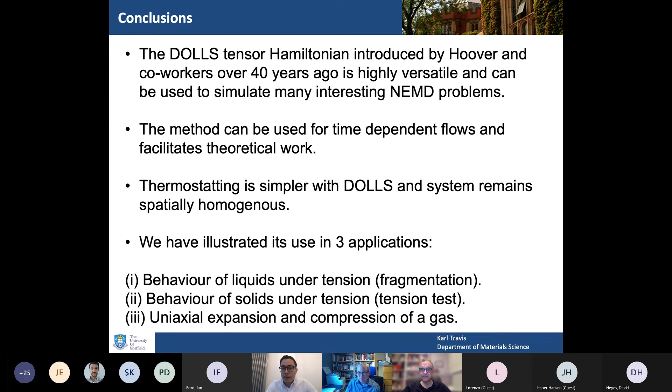Are you able to go back to the image where you had the tension? I think it's slide 16. Yeah, do you have periodic boundaries in the transverse direction to pulling? No, there are no periodic boundaries. What happened when I tried periodic boundary conditions in the y direction as well is that the material slipped along lines. It didn't look physically reasonable, so I went to dropping the periodic boundary conditions in the y direction. And you don't get the Poisson's ratio from this, no? You can't get Poisson's ratio from this - it's pure uniaxial tension with no change in the y direction.

Have you maybe tried this displacement method, where you take regions on the side and displace them by a bit, let it equilibrate, and repeat it, sort of mimicking how you would do this in an experiment? Have you tried that technique? No, I haven't, and that sounds interesting.

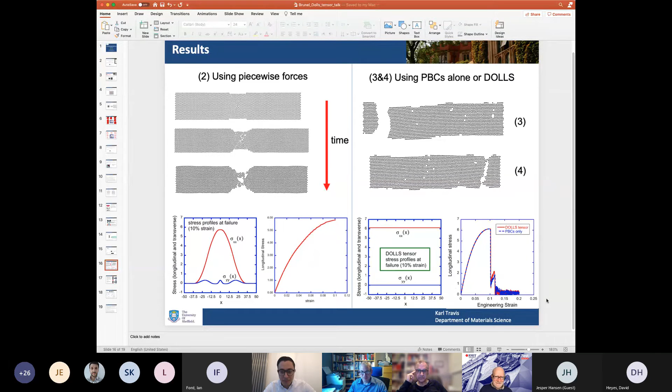All right, Peter, go ahead and ask a question. Yeah, just a quick one - Karl, I really liked your Carnot cycle simulation. Yeah, that looks really neat. I guess you can study finite time processes too, then look at differences between fast cycles and slow cycles. And yes, you could do that, and look at irreversibility. Yeah, the full ramifications of this haven't sunk in yet because I only finished this on Saturday. It was just something I was thinking about for the teaching application.

Nothing more - you've got a tiny difference between your two temperatures, really, haven't you? It'd look a lot nicer if you had a bigger difference in the temperatures, I think. Yes. Carnot cycles are shocking for the amount of work you get per cycle - you can see it there, can't you? Yeah, no wonder they're not practical. Yeah, I just wanted to comment on that. Yeah, it looks really nice, Karl. Thank you.

Hello, yeah, thank you very much, and thanks for organizing such a nice workshop meeting. Can you see the slides by now? Yes. Okay, cool. So what I'm really presenting is part of the PhD work of Ahmad Mokhimi Khairabadi, an excellent student at ETH Zurich. Unfortunately, I think we've lost him to industry by now, or very soon.

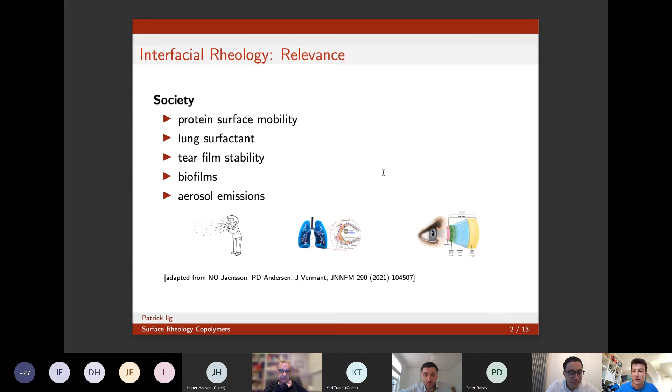This was supervised by Leonard Sagis, a professor at Wageningen University and an expert in surface rheology, along with Martin Kröger, probably well known in the NEMD community, and whatever I did in this business. So interface rheology - we haven't heard so much about it today, and it's a rather newer field. Maybe I should briefly motivate its relevance. I took this from a review by Jan Vermant and Patrick Andersen this year. They distinguish relevance in society - for example, lung surfactant, where the properties of the interface and how it flows is very important. In your eye, tear film stability or other biofilms are also important, and unfortunately aerosol emissions have been much talked about recently. Of course, industry also has interest in these things - foaming, blending, emulsification, and to some extent 3D printing and encapsulating.

There's relevance to this interfacial rheology. So how do experimentalists do that? It's rather new, and I think it's fair to say they're still figuring out how to best measure it, because we cannot use our cone and plate devices, since you want to measure the rheology of the interface.

One approach is you take a Langmuir trough and put a rod in it, make it magnetic, so you can move it with a magnetic field in plane, and then measure how much this thing moves for a given perturbation and work out the interface stress from this.

The bicone in the middle is something closer to a usual rheometer, but what you try to do is shear only the interface. So you have a bicone with a tiny opening angle. You want to place it right at the interface, and then just do rotational rheometry on the interface.

This is also commercially available now from Anton Paar, and there's a double wall ring experiment where you're trying to do the same, but with a better defined flow because you have this double wall ring. Anyway, the message here is that it's new, and experimentalists are still more or less trying to figure out how to do it best.

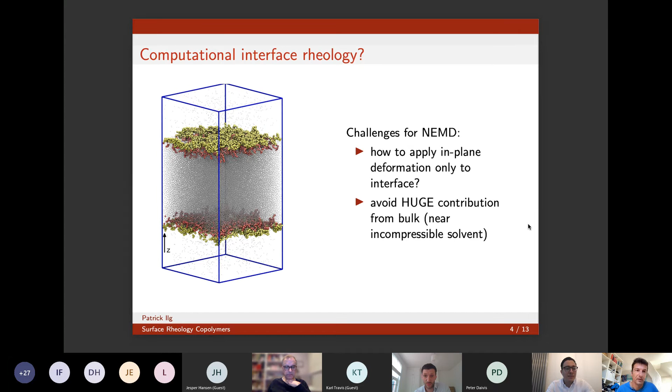But we hope to still benefit from simulations being way more flexible, right? We can invent some stuff. So we do molecular simulation. Let me briefly introduce the model.

You won't be surprised. You have a Lennard-Jones part here, and we're looking at polymeric molecules, so we have a bonding potential. For the experts, this is just the Kremer-Grest standard model.

In addition, we have explicit solvent, which for simplicity we take Lennard-Jones-like particles and say they are water-like, which just means our Lennard-Jones interaction parameter is 1.

The polymers, the surfactants we are looking at, are called pluronics. They are copolymers, and they are symmetric. They have 3 blocks: one PEO block, then a central block of PPO, and then again PEO. The idea is that both ends are hydrophilic and the central block is hydrophobic.

So what you imagine is you have a kind of hairpin where both ends want to stick into the water. We model this by different values of the Lennard-Jones interaction parameters with the water molecules.

We look at rather short chains of 50 beads and have a reasonably sized simulation. We do that at the Lennard-Jones gas-liquid coexistence point so that we have a liquid-vapor interface.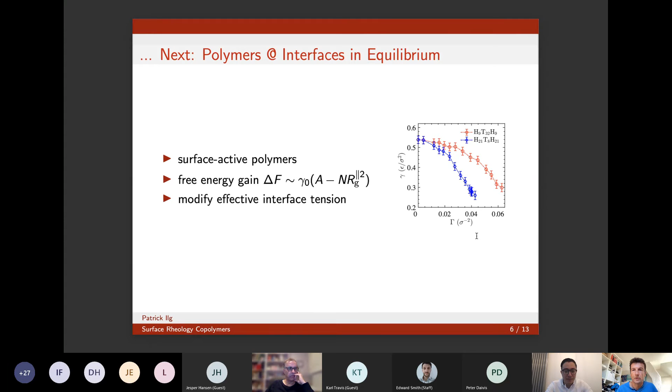If you have polymers, the relevant length scale is the gyration radius parallel to the interface. Because polymers are flexible and deformable, what you expect is that you get some pancake-like structures, taking out as much interface area as possible, as much as entropy allows them. So we see that the effective interface tension is modified quite a bit, shown here on the right versus the interfacial area concentration.

Okay, so now finally coming to the rheology. How do we do that? Again, the problem is you want to only deform the interface and not the bulk, and you want to compress it. So our idea was to use semi-permeable moving barriers.

On the left you have a snapshot of the system. In gray are the water molecules. So we have a liquid phase down here, a vapor phase up here, and we have our pluronic molecules at the interface, the hydrophilic ones pointing inside and the hydrophobic ones on the surface. That's how it should be.

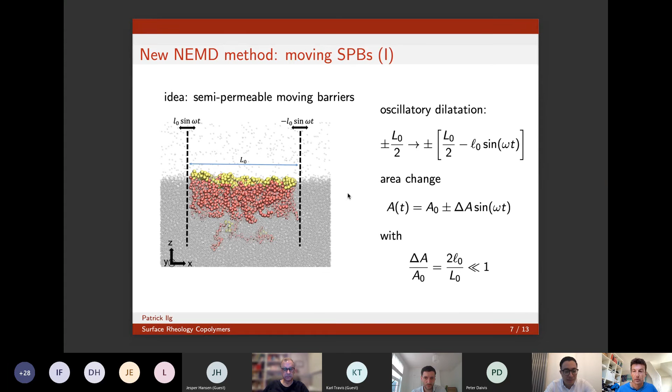Okay, so that's the setup of the simulations. Below you see snapshots of the simulation, and highlighted here are one of these chains, and indeed is what you expect. You have these hairpins pointing into the water, and then a small bridge of the hydrophobic midtail, whereas in the other pluronic, because the heads are smaller, this is less pronounced, and you see characteristic differences here.

So I've explained how we impose the deformation. How do we compute stresses? This we do by explicitly calculating the force that is exerted on the barrier, and from the difference to the reference state, this is the excess or the extra dilatational surface stress that we find on these barriers.

Then we want to be in the linear response regime, and so be able to relate this surface stress to surface dilatational moduli, which are denoted by capital E. And as usual, we distinguish the real and imaginary part of that.

Why don't we do shear if this thing is so complicated? Of course we did shear. That's the thing we did first, and we verified that we get a reasonably linear profile. The problem is that in almost all experiments you see close to zero stress responses in this. The signals are simply too weak to make any reasonable connection from the simulation to the experiments.

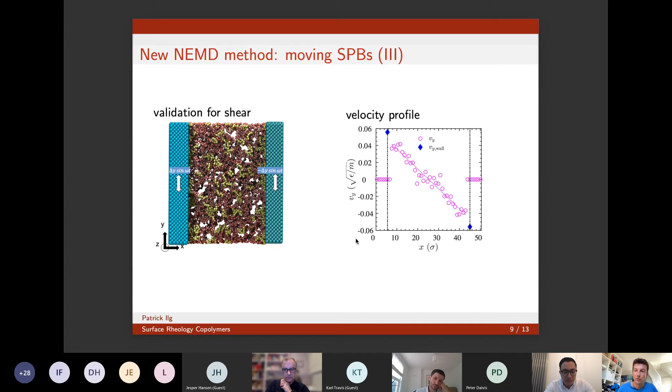So we have to go to dilatational. All right, so here are some results for the dilatational moduli E prime and E double prime as a function of Deborah number, which is just a measure for the frequency of the deformation times the characteristic relaxation time of the molecules. On the left and on the right, you have the different systems.

What we find very characteristically for both of these molecules and also for different concentrations is a rather extended regime where the moduli increase with the square root of the frequency.

This is a bit puzzling. I mean, this is first of all very different from what we are used to from bulk polymers, which go linear and quadratically. So, of course, we would like to have something like a Maxwell model or a simple constitutive model describing that. For the experts, there is, in fact, a constitutive model claiming a square root of frequency dependence here - that is Lucassen and van den Tempel.

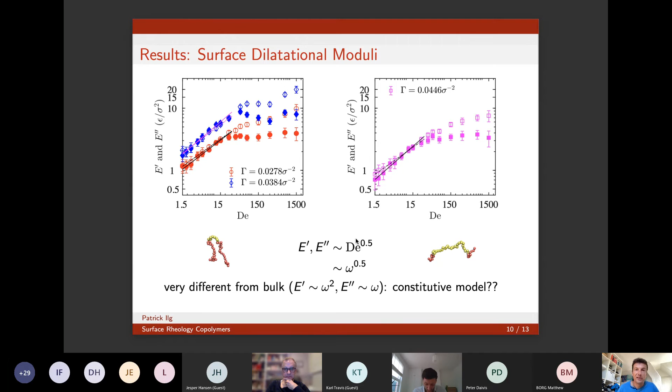But the thing is that they have a completely different mechanism that is absent in our simulation. So we can have apparently coincidence, but for the wrong reason, let's say. If we try to compare to the experiments, well, this is semi-quantitative. Unfortunately, we were not even able to go down in frequency as much as we thought.

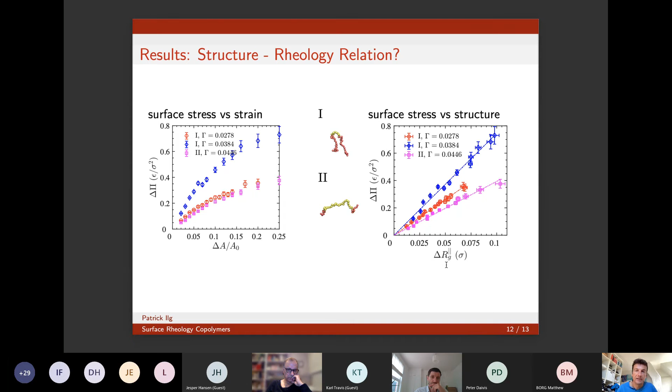One tiny first step we did was trying to relate structure and rheology. On the left you see the surface stress, the extra dilatational stress versus the area change. On the very left are the linear response regime, very tiny deformations, up to 10 and 20% area change, which is quite in the nonlinear regime. We also measured the change in the gyration radius, the in-plane component, on the right-hand side. If we plot them parametrically against each other, we find they are nicely linearly related, which gives us some hope that a relatively simple constitutive relation can be found for this interfacial rheology business.

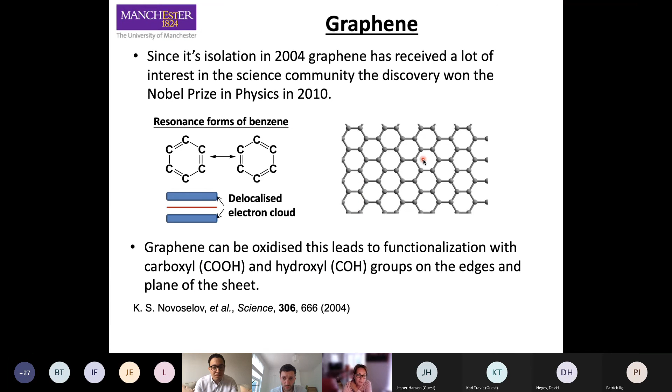We have been working a bit on graphene oxide, but this talk I'm going to focus only on graphene, so completely unfunctionalized surface. Despite the surface being, as I was saying, not reactive at all, some interesting things happen at the interface between graphene and graphite and electrolyte.

Basically, anything can stick to the surface due to this electron cloud formed by these pi electrons that are on top of the surface of graphene and graphite. And this has been seen experimentally as well as from ab initio molecular dynamics.

So we are interested in the interface between graphene and electrolytes. This is because graphene oxide and also graphene can be used for desalination purposes, for example, but this interface is also very much present in a lot of electronic devices.

Experiments—this is a cartoon describing STM experiments, for example, with HOPG, which is this highly oriented pyrolytic graphitic surface, and these should be the ions, basically, of the electrolyte.

These are experiments instead with spectroscopic measurements. They both show that there is adsorption of ions on the surface of graphene, even when it is very mildly charged. And this ab initio molecular dynamic simulation performed on carbon nanotubes with, again, an electrolyte that has been flown through, pushed through it.

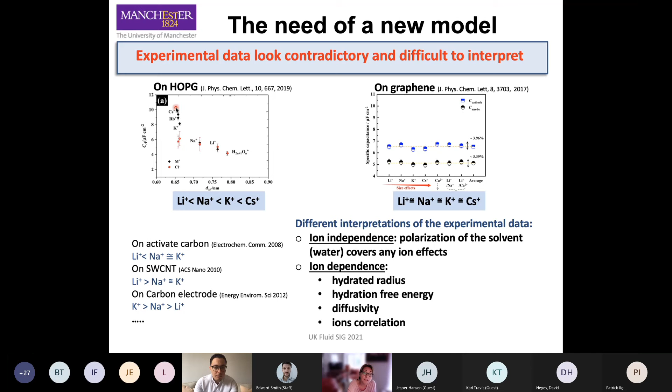And there are many other results in the literature on carbon nanotubes, activated carbon, and generic carbon electrodes. There are different explanations to justify ion specificity and no ion specificity. In this case, the explanation is that basically the water polarizes the surface and covers any ion effects. In another case, instead, there is a relationship between the size of the ions, with the capacitance, with the absorption.

So we did some calculations ourselves because we were very interested to see what happens and why these ions are absorbed or not. We initially started with DFT calculations. So if you perform a DFT calculation of, for example, a flake of graphene with an ion on top of it, and then calculate the absorption energy as the difference in energy between when the ion is far away from the surface and when it's absorbed, you obtain negative absorption energy, meaning that the ions are absorbed, but these are very huge numbers. You have the trend that you expect: smaller ions adsorb less, larger ions adsorb the most, and divalent ions absorb more than monovalent.

Divalent ions absorb more than monovalent ions. However, if you take into account that the ions are very happy in the bulk, because they are hydrated there, and then perform the DFT calculation with an implicit solvent rather than in vacuum, you see that the absorption energies are still negative, so there is still absorption, but the values are much smaller, and there is no specific trend with the ions really.

So what we wanted was to perform molecular dynamics. One idea we had was to basically take the value of absorption energy that we calculated with an implicit solvent DFT calculation and optimize the epsilon value of the Lennard-Jones potential between the carbon and the ion until we were reaching the same minimum in the absorption free energy that we obtained from the DFT. This is because in the DFT, when you use an implicit solvent, the absorption energy you calculate is actually free energy, not just energy.

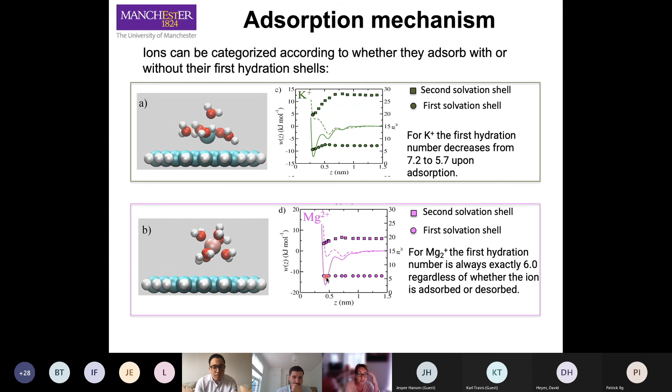But magnesium, for example, tends to absorb anyway. It needs to, in order to absorb, lose some water molecules in the second solvation shell, but no water molecules in the first solvation shell. So there was a very complicated balance between size, hydration free energy, and the distribution of water in the first and second solvation shells.

There was, however, a limitation in this approach. The first one was that in the parameterization of the Lennard-Jones potential, we used only one ion, so we totally lost the effect of ion screening, the presence of other ions at the surface. This was taken into account through the Lorentz-Berthelot rules. We also parameterized this epsilon assuming that the interaction between the carbon and the ions could still be modeled with Lennard-Jones 6-12, and not some other form of Lennard-Jones.

Also, the DFT calculation using a continuum implicit solvent model underestimates the dehydration free energy cost, because you can basically use just a fraction of water molecules. So the ion can still feel kind of hydrated even when it's very close to the surface, because it can be hydrated by a fraction of water molecules. But in reality, an ion, if dehydrated, loses an integer value of water molecules. So there was an underestimation of the dehydration free energy cost.

So ideally you go for a full QM approach. This has been attempted two years ago. These were calculations done by Zhang in the US, where they did a quantum mechanical DFT calculation with an implicit solvent. The difference is that they could take into account concentration of the ions in this implicit solvent. But here again, you lose any dynamics information, because what you do is take an ion and force it into different positions away from the surface with an electrolyte around.

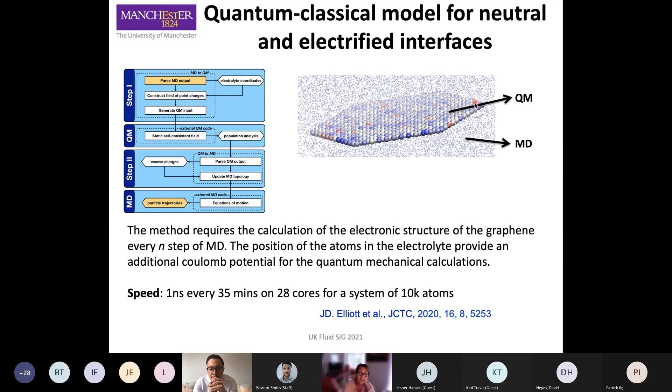So for a very large system, we have at the end the full electronic structure of the graphene, and we can apply an electric field, so we can actually charge it, etc. I'm going to show you the results on that.

I also want to show that now we actually have a new workflow that is even faster, because we have been able to replace completely the DFTB calculations, the quantum mechanical calculation, with a neural network that has been fed with the DFTB calculation. So now the procedure is even faster than that, basically as fast as a standard molecular dynamics.

So with this procedure, we can actually see the proper polarization of the graphene. For example, let's say I have this flake of graphene, and I have an ion at a different distance from the surface. So I see the surface from the top in this case, and the ion is at different distances from the surface.

I can calculate how much, so for example here what we plot is just the total charge of the carbon in the first ring, the second ring, the third ring, etc. So, zero is just because zero is nothing. Basically the whole plot starts here. The various colors correspond to the distance of the ions from the flake of graphene. You can see that as the ion gets closer, from blue, red, green, to the black curve, corresponding to the ion approaching the surface.

The amount of charge that is delocalized, created by the presence of the ions, increases. And you can see, as I was mentioning before, this polarization is very, very large in size, because the effect of the ions is felt up to here.

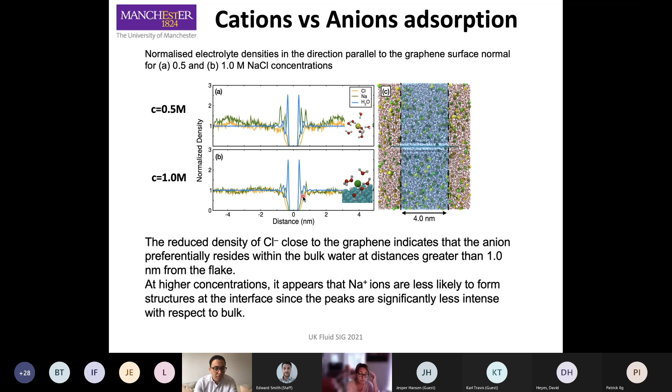So we didn't expect, to be honest, these results. We thought that the sodium was actually going to dehydrate, so we tried to figure out what's going on.

What you can do is calculate the energy of these ions as they approach. We basically have a fixed ion that approaches the surface at different distances, with an electrolyte nearby, and we calculate the energy between the ion and the carbon, the surface of the graphene, as the ion approaches.

We separate the Coulomb term from the Lennard-Jones term, and we look at this at different concentrations again. When the ion is far away, it doesn't feel the graphene at all. Then it starts to be attracted by the Coulomb, the electrostatic interaction, when it's roughly at 3 angstroms.

But what happens is that in the case of chloride, which is much larger, there is the Lennard-Jones energy. As soon as, from the electrostatic point of view, the ion is absorbed, it tends to absorb, and there is a negative Coulomb energy due to polarization. The Lennard-Jones shoots up, so the chloride will never really dehydrate.

The sodium, however, should dehydrate, because you can see that the Lennard-Jones is always negative. So overall, the absorption energy is negative, but the ion doesn't dehydrate. The reason is because sodium has a very high solvation free energy, so in order to dehydrate even one molecule of water, there is need of a very strong absorption energy. A full dehydration probably is not going to happen with neutral graphene.